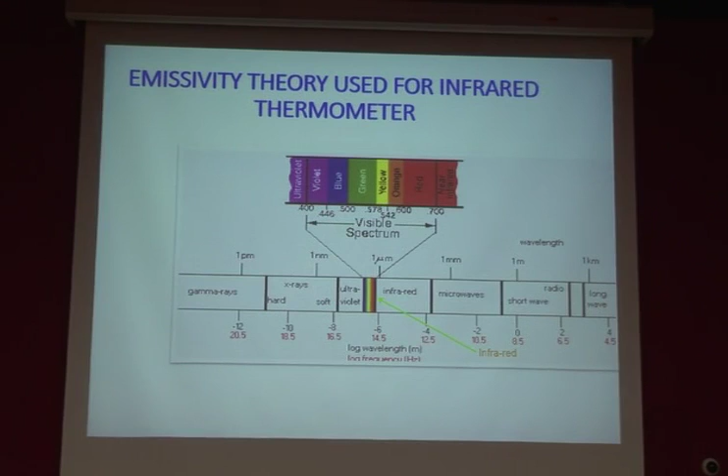This just shows you some of that. These are what you can see with the eye. Now the infrared takes us to areas we cannot see with our eyes. Infrared is not part of the visible spectrum, which is shown up there. But what it does is gather that information so we can use it.

It collects all the energy coming off as radiation, and then converts it. There's a little computer in there, if you will, that converts the captured energy and gives you the temperature of the material. This is what the equipment looks like.

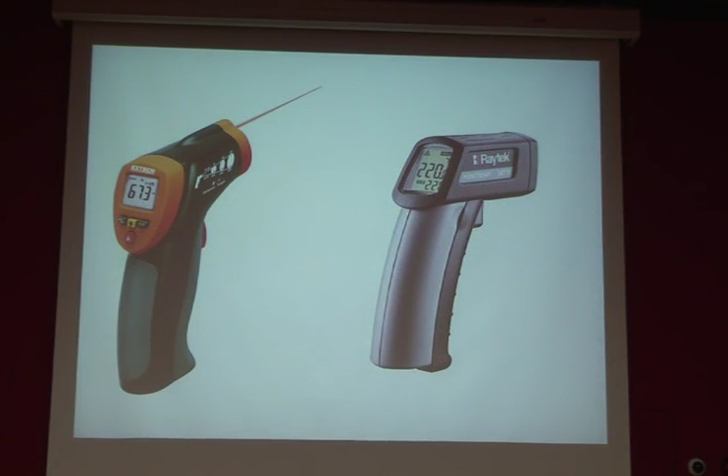These are 2 different types of equipment from 2 different manufacturers. It's a very simple piece of equipment to use. There are some limitations: you have to be fairly close to the object. If it's 1 centimeter wide, you have to be within 8 centimeters to take the shot.

So you cannot use this, for example, to take the temperature of the sun — it's obviously way too far away. So you have to be fairly close to it. There is a laser sighting on it.

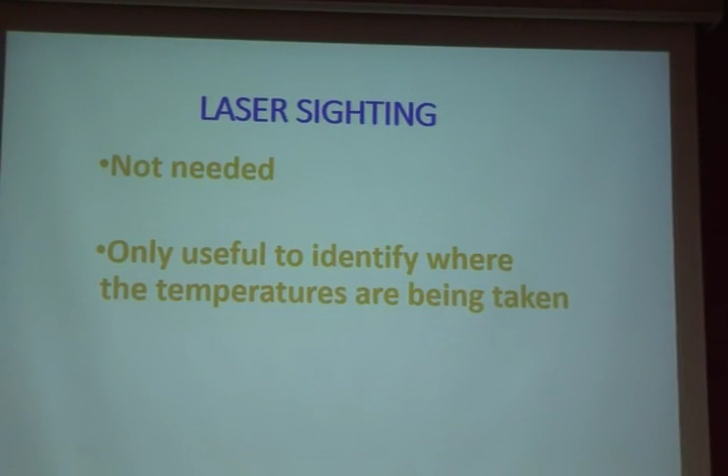I'll show you one of the pieces of equipment. This is what it looks like, and if you look over here, you can see there's a laser with it. The laser is important only in that it identifies the object we are taking the temperature from. It has no basis or input into the calculation itself — it's only useful in identifying the object.

Here is the typical information you get from this. The particular ones I'm showing you have a temperature range of 20 to 300°C, accurate to about 1.5°C. I have 2 pieces of equipment here that I was checking right before the presentation — the variation between them is about half a degree. That gives you an idea of how it works.

It's got typical battery power, and if you want to take it to the United States, you can actually use it on the Fahrenheit scale as well.

There are some limitations. We've already talked about one — you have to be fairly close to it. But what's very important is that all it measures is surface temperature. So if I were to take the temperature of my arm, I get a reading of 30.9, which would mean if I were in the hospital and they took my temperature that way, I'm basically dead.

What it's doing is measuring just the surface temperature of my arm. When a medical doctor takes my temperature, they stick something in my ear, under my tongue, or in some hospitals, elsewhere — I'm just glad they don't use something like this for that. So it measures only surface temperature, and that's very important for us to realize.

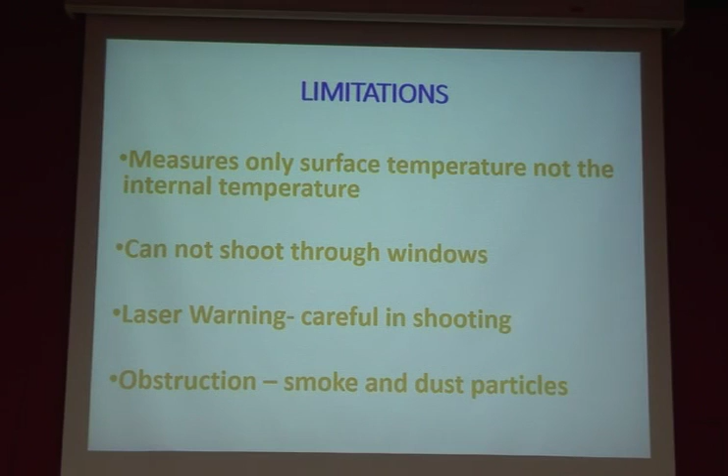So what can we use it for? Well, it has several uses. We can measure, in our construction area, the forms and the reinforcement.

In ACI documents, it says that all embedded materials should be less than 50 C.

Now, I live in Arizona, which is a desert. Very hot temperatures, we will get up to 50 C in our area. And unlike Singapore, our humidity is often less than 10%. So it's quite a bit different. If you get into your car in our area, many times it will be 60, 65, 70 C just because of the heat buildup.

You'll see the same thing happening in construction, that the steel forms or steel embedments will be very hot. We can use it to estimate the concrete temperatures during placement, and on many specifications, we have to keep the temperatures above 4 and below 35.

We can also use it for temperature control. We can determine the temperature of the mixture and maintain it during curing, and we can use it to determine the concrete temperature to get a good estimate.

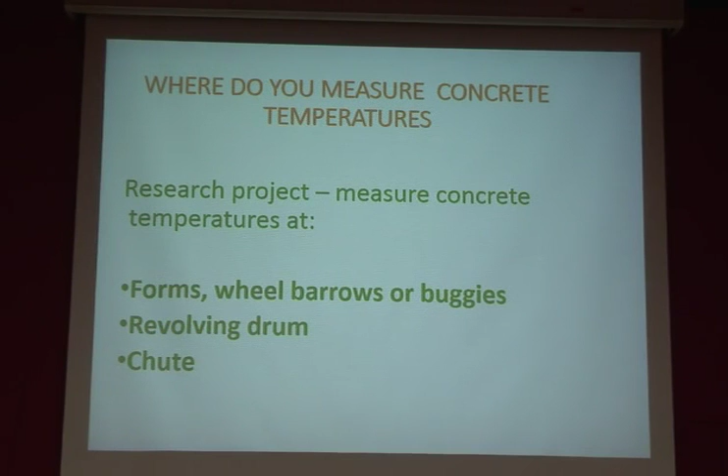Now, if we're doing this on an official basis, following a procedure, we have to stick the thermometer in 75 millimeters, tap around it to make sure it's seated, and wait for 2 minutes. What we did is a research project where we looked at where we could do this and get the same temperature that is often required on a job site.

We looked at 3 areas, and what we found is that as the concrete is coming onto the chute, if you take the temperature there, it is a very accurate estimate, very similar to the required temperatures we might take. We can use it to determine the concrete temperatures of a mixture.

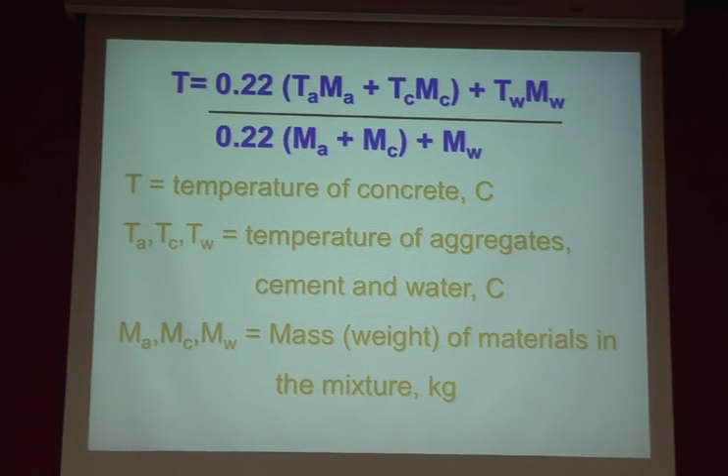This formula is a very common formula you'll see in many concrete textbooks. It tells us that if we know the mass of the materials and the temperature of each material, we can calculate it. So if we get the temperature of the cement, the coarse aggregate, and the fine aggregates, we can put it into this equation and calculate it.

I have a computer program if anyone is interested, and I'll leave that with the chapter if you'd like to use it. It's copyable — it's something we did as a research project at the university, so we make it available to the public. We would have to chill that water down to 24 C if we're going to maintain that 35-degree temperature.

And the way we would get these temperatures is by using the infrared gun to determine that before we put the materials into the concrete.

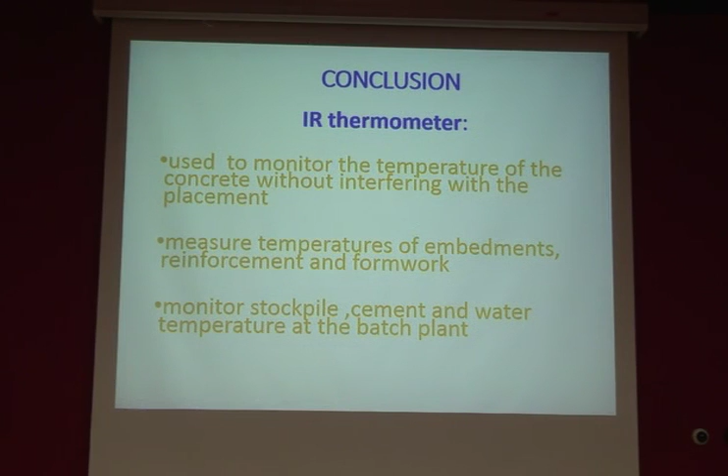So, to give us a quick idea of what we can do with the infrared: we can use it to monitor the temperature of the concrete without interfering with the placement.

Again, if you are going to do the official test, you've got to get a sample into your wheelbarrow. That means you are diverting the work, diverting the concrete into the chute itself, interrupting the work.

So if we use the infrared, we can check every truckload of concrete, especially when it's really hot. If we have an upper limit on the concrete, we can check every load and get information back to the batch plant in case we need to make corrections.

We could use it to measure embedded items in the concrete and the formwork itself, and we can monitor stockpiles and determine the temperatures of that material.

Our second part of the talk is about preventing plastic shrinkage cracking. This is a serious problem in very dry areas like Saudi Arabia and my home state, Arizona, where we live with this as a constant problem. Plastic shrinkage cracking occurs when the rate of evaporation is greater than the bleed water of the recently placed concrete.

In essence, what's happening is the evaporation rate, because it's very hot, windy, or has low humidity, causes water to be ripped out of the concrete. And when it's ripped out of the concrete, the end result is cracking.

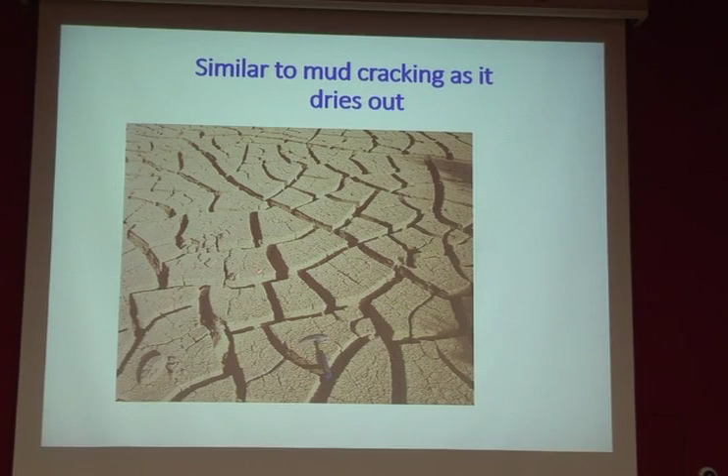You may be familiar with it if you look at a mud puddle drying out after a rain. You can see the cracks that occur in that. In concrete, this is what it would look like.

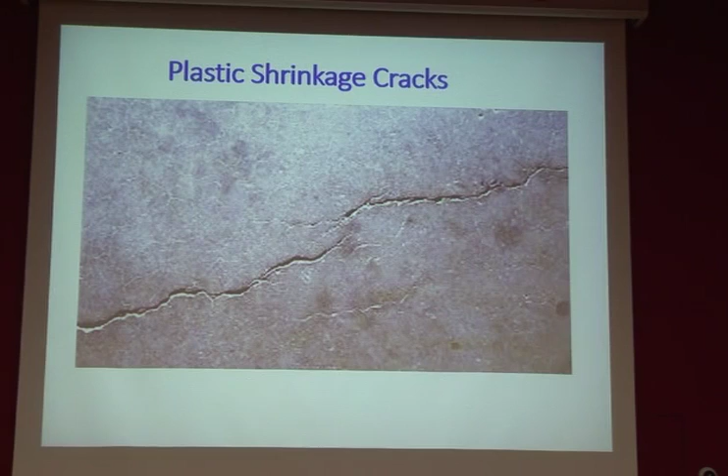These are cracks. If the wind is blowing, you can see where the wind has been blowing on that. They're very problematic in some areas. They tend not to interfere with the structural aspect of it, but where you have seawater or cold weather, water can get in and work the crack open even more. If it's seawater, that's a place where seawater can reach the rebar, leading to corrosion issues as well.

I've done a lot of work on this particular issue, and I've developed a computer program that's available for you if you'd like a copy. There's also a graph given in ACI 305 and 308 that's very helpful.

Now, the graph is old technology. What I'm going to show you is research work done in the early 1900s to determine the evaporation rate off of lakes. In 1940, some people at the National Ready Mix in the US found this and said water on lakes is very similar to water on concrete, so we can use this.

This is back in the 1940s when we didn't have a lot of computer programs. I didn't have computer programs—we did all our work by slide rules. Many of you who have collected old engineering books know we had a lot of charts and graphs to make it much simpler for the engineer to use. That's what this technology is.

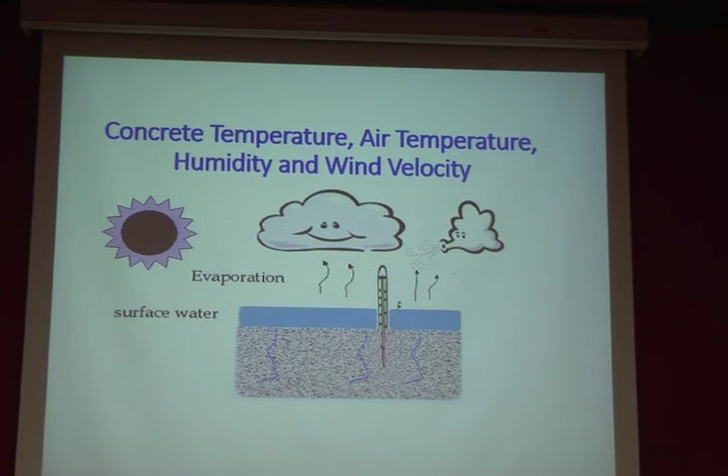What it does is show there's a relationship between evaporation and concrete temperature, air temperature, humidity, and wind velocity. If we know those, we can calculate the rate, and they give you this graph—not something most engineers today are used to using.

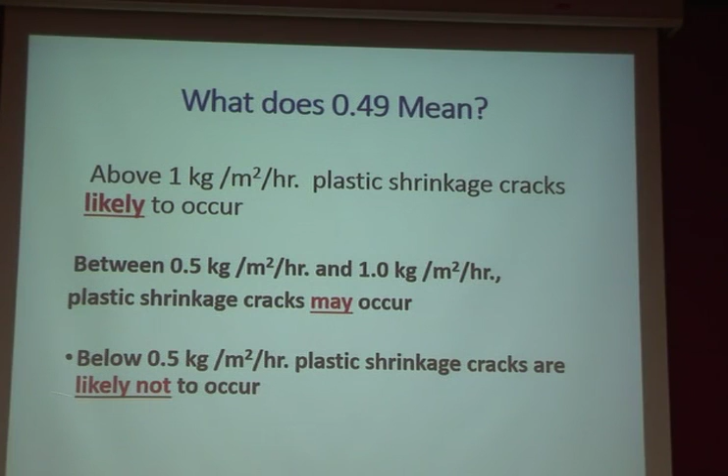So what does that mean? What we've found is if it's above 1 kilogram per meter squared per hour, plastic shrinkage cracks are going to happen—you can almost predict it. If it's between 0.5 and 1, it may or may not happen; it just depends on how lucky you are that day. If it's below 0.5, they're likely not to occur—you can almost predict that they will not.

In our case, because it's 0.49, we are in a safe zone, so we won't have to worry about plastic shrinkage cracks. Now we've solved one issue in that we can determine whether we can get plastic shrinkage cracks. But the second problem is, how do we get that information?

Where do we get wind velocities? Where do we get concrete temperatures, air temperatures, and relative humidity? I've gone on many cases, and as a young engineer, I got called in on many of these cases of cracked concrete. How do we get the information?

Well, the information after the concrete is already placed is already cracked. So that's not very helpful if I'm a contractor or a ready-mix supplier, because I'm going to get blamed for the concrete if I'm a ready-mix supplier. If I'm the contractor, I may even have to replace concrete. I recently worked on an airport where they had plastic shrinkage cracks, and whole slabs had to be removed because a contractor did not pay attention to the weather conditions.

So where do we get that information? When I started in this, I would go to the local airport information published in newspapers and things like that and collect that information. If that's all you have, that's probably the best you're going to be able to do.

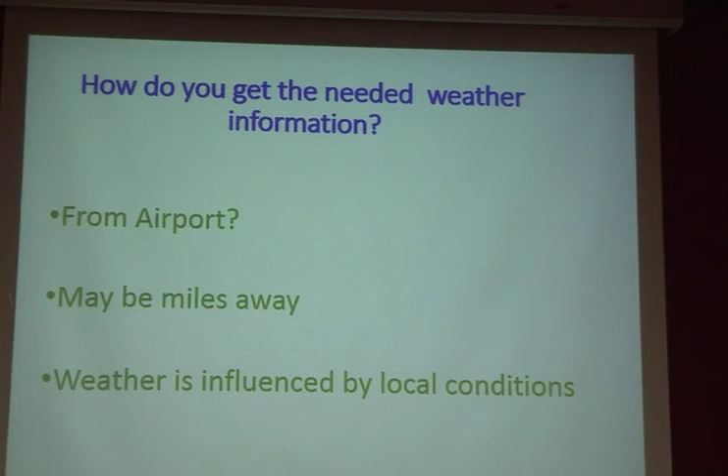So how do I get that information? Well, that's where this type of equipment, what we call a handheld weather station, comes into play. This is a particular one. By the way, many people who do competition shooting with rifles and handguns will use things like this. For people doing sailing or skiing, they might be using equipment like this.

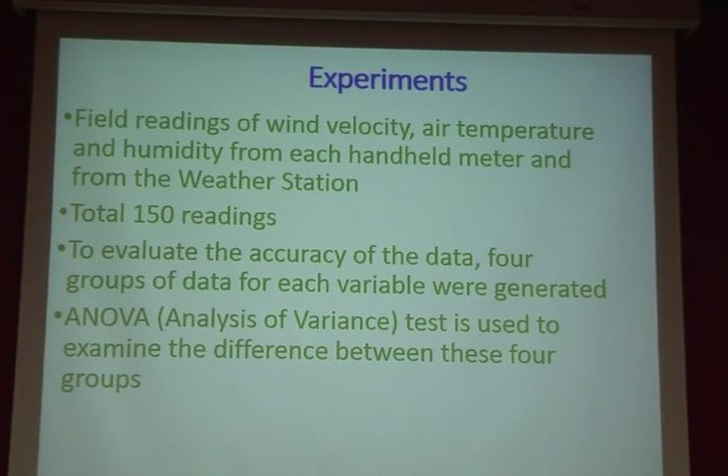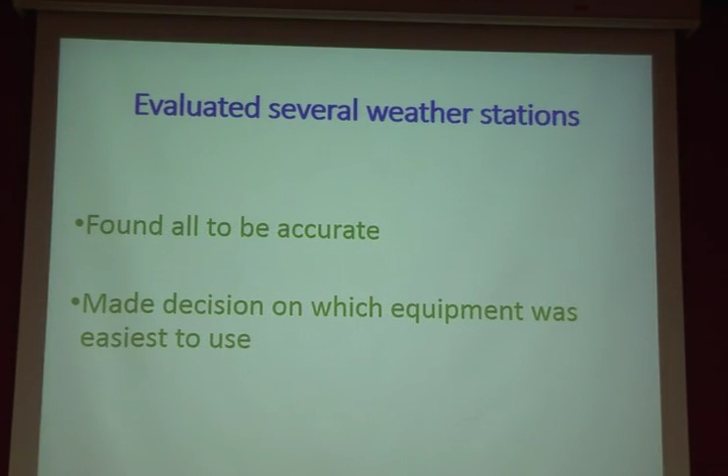I particularly like this piece of equipment because it's easier to use. Some of the other equipment requires pushing two buttons at the same time and things of that nature, and if you don't use it every day, it becomes very cumbersome to figure out how to use it. We found all to be accurate, and we made our decision based on which we thought was easiest to use.

Now, we have used this on airport construction projects in our area. We do most of our concrete work at night. We get up over 50 C in our area, so at night it actually cools down to maybe 35 C.

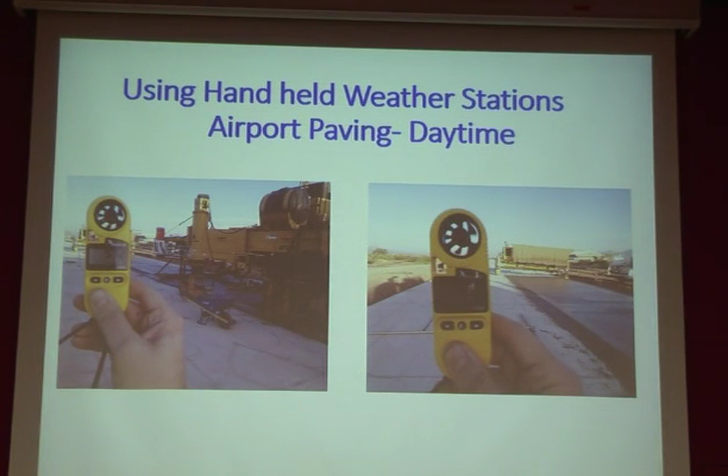When we have low humidity, which isn't a common problem in your area, but in our area I've actually seen relative humidity as low as about 2%. That's a very difficult time, especially when it's windy and we have hot days. Anything that increases evaporation is going to be bad for the concrete.

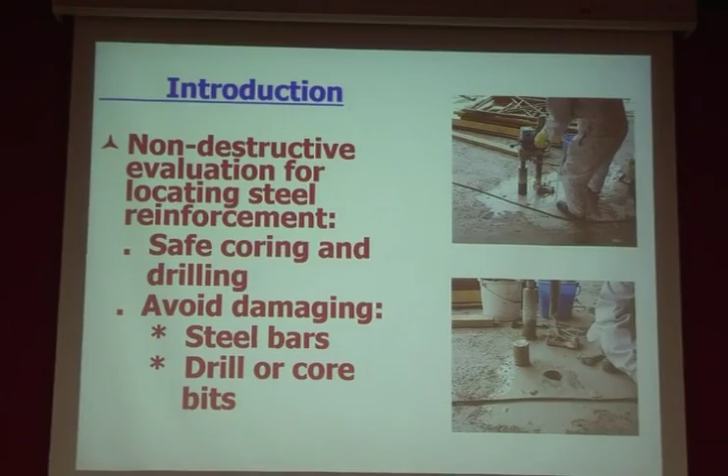Why do we need to worry about rebar anyway? Many of us get involved in concrete work where we have to take cores because we had an issue with the concrete. If we're going to take cores or drill a hole into concrete, the last thing we want to do is hit the rebar. So if we can find a way of not hitting the rebar with equipment that is relatively easy to use, that would be very beneficial to us.

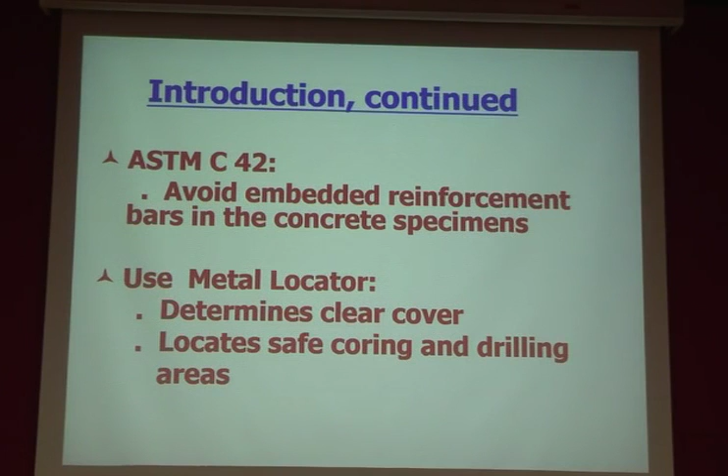ASTM C42, which is the code we use in the United States, talks about how to take cores. It says to avoid embedded rebars, and thus we need to determine where the rebars are and find safe locations.

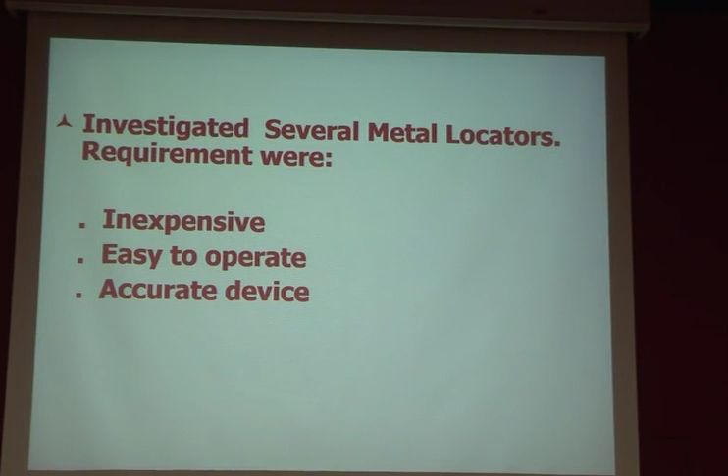In the United States, we would pour the concrete slab, and then we would pour on top of that the concrete that we would then lift up to be the wall. Thus, we have a lot less forming issues on that.

But we had to put in more steel. And because we're putting in more steel, it becomes very difficult to locate it when we have lots and lots of steel in there. If you are using a piece of equipment, there are many places where we have steel in there that is not continuous.

Now, if this is a concrete floor, we can pretty well know there's going to be steel running this way and there's going to be steel running this way. So knowing that, and knowing that the steel is continuous, we can use that.

So what we would do is we may scan this way 2 meters from the wall to find where the rebars are, and then go another 2 meters, then another 2 meters, and put chalk marks on the floor. If it's a rebar, it will be continuous.

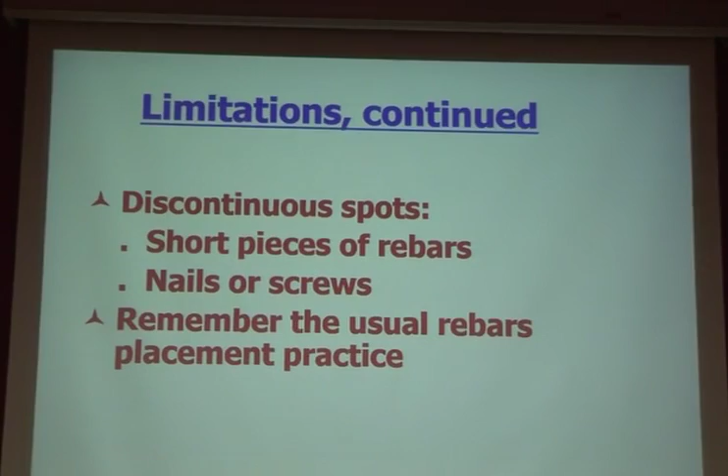If there's an area right here that I get a reading, that may be where someone dropped some nails in the concrete, or maybe there's a tin can there. There may be lots of reasons why there is a piece of steel in a particular area that is not a rebar. So you've got to be able to trace the rebar itself.

The equipment - first thing you got to do if you're going to do this, you got to remove all the dust and debris from the floor. You got to have a clean floor to start out.

You have both an audible and a silent mode. I don't recommend using the audible. If you're using that, it'll get very distracting to you because you'll hear beeps all the time. When I use the equipment, I turn it off and I spend my time looking at that equipment.

And if you don't have the sound on, you'll see a maximum reading. Then as you start to move away from it, it will go from a plus sign to a negative sign. So you can very easily determine when you are over the rebar, and it would also give you a reading of the depth of the cover.

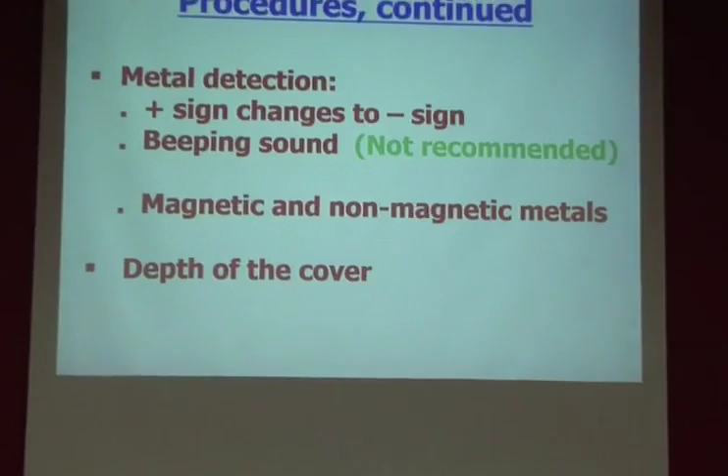So the way I would recommend that you do it is you use chalk marks. Again, move every 2 meters and put that down. This shows you how we developed a pattern. So we went every 2 meters, put that down, and then we went the other way, and we found the dotted black lines show the rebar locations.

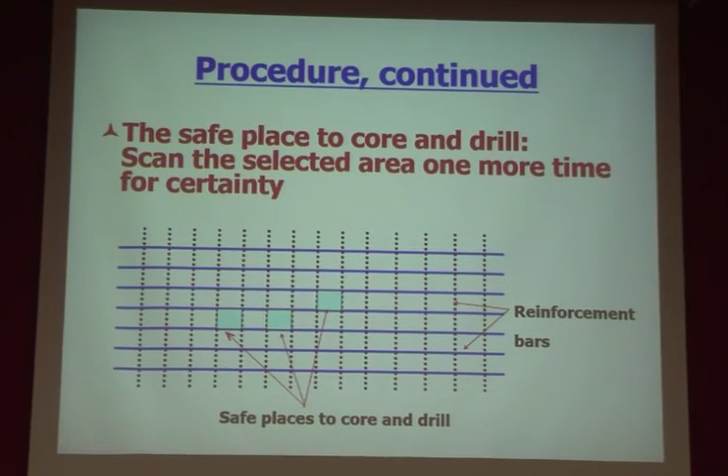So if we are going to take cores, we know, for example, right there is a good place to take a core because there is no rebar in those areas. So again, we've got a way of isolating where it is safe to take a core, or in another way of saying it, where the rebars are not.

So again, we did a study in our laboratory. And what we did is we used different size rebars. I put spacers on that. You have to get this up high enough and away from all metals.

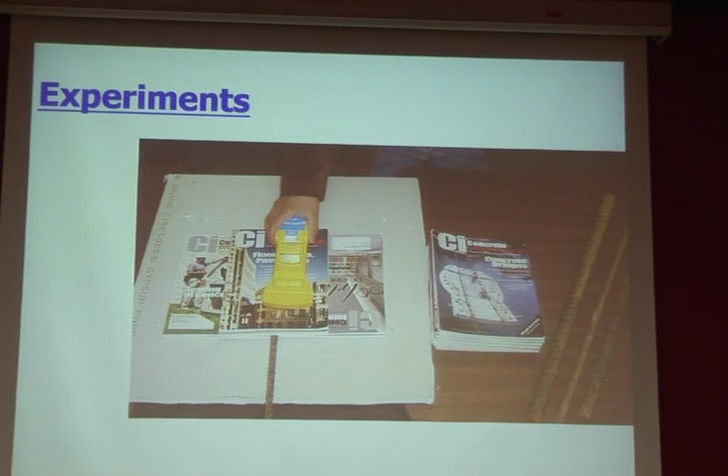The first time I did this, I had my students go to my office and I said, grab some of the magazines. It doesn't make any difference whether it's magazines or concrete, it's just measuring the distance between the rebar and where you are. They got a whole bunch of magazines that had staples holding them together. And when we did the scanning, we couldn't make it work. Well, it was identifying where the staples were in the magazine that was holding it together.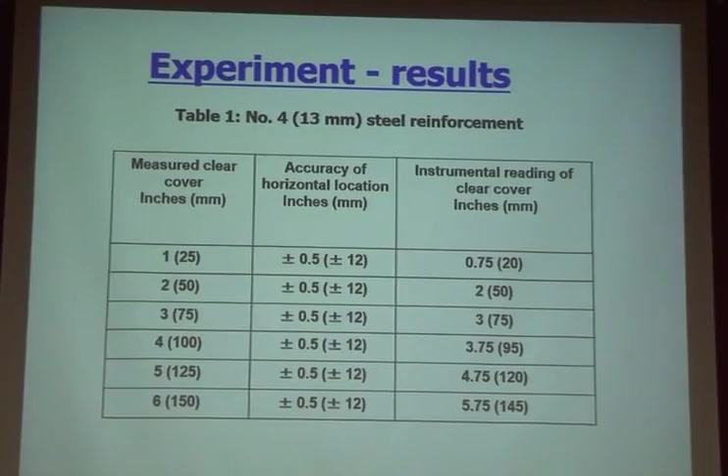This is done in the US, so we had a number 4 bar, which translates to 13 millimeters. You can see that when we scanned it, we were within 12 millimeters both ways, scanning it to be able to locate the rebar, which was stationed at 25 millimeters, and it gave me a reading of 20. You can see the data down there, the ones in parentheses. That's for a number 13 rebar.

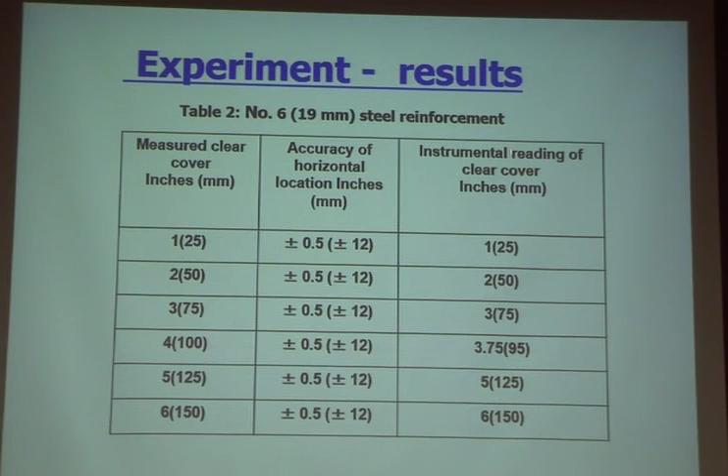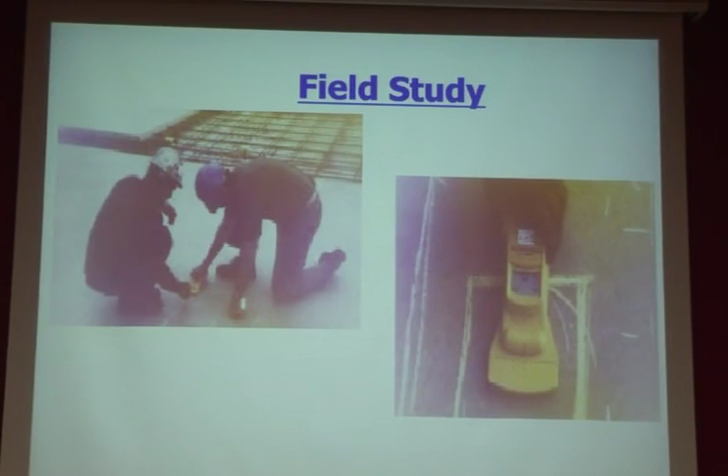I was doing some projects over in Mongolia, working with some of the students there. This shows finding areas that are a safe location, and this is a field study where they were finding the location of steel in pipes and finding steel in them.

Speaking bluntly, if I was doing a consulting job and we had pre-stressed cable in there, I would probably use a much more sophisticated piece of equipment, like ground penetrating radar or some of the more expensive cover meters, because as you saw here, it was within 12 millimeters, and the last thing you want to do is hit a post-tension cable.

But for a typical construction rebar, where I'm trying to make sure I avoid where the rebar is, I find this is a good piece of equipment, and one that I can easily train a crew on how to use.

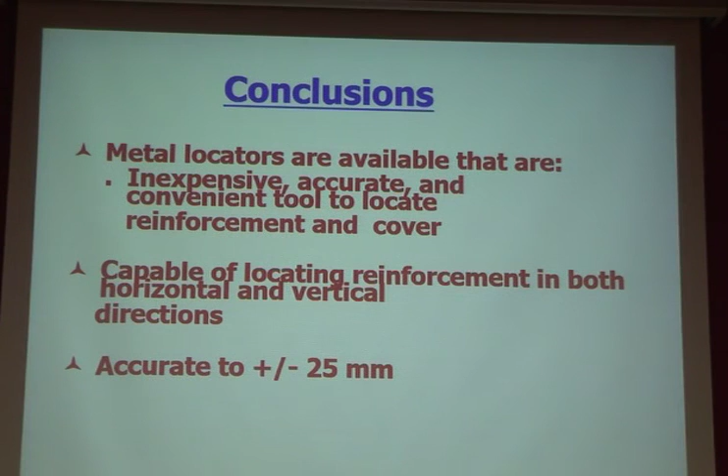It's accurate within, the company says, 25 millimeters or 1 inch. We found it was really a lot more accurate than they claimed it to be, and suitable for finding locations.

As we were working on this, we found there was some need for other equipment, and many people will even want an easier to use piece of equipment, because what they're trying to do is a much simpler type of thing. As an example, if I'm doing a masonry wall, I may want to just do a quick check - did they put the steel in there? Or if it's got horizontal joints, are there steel in the joints?

So there was another piece of equipment out there that we were investigating. The company asked me, is this equipment easy enough to use so that people not familiar with using this type of equipment, and international people who may not have English as a first language, would they be able to use this piece of equipment?

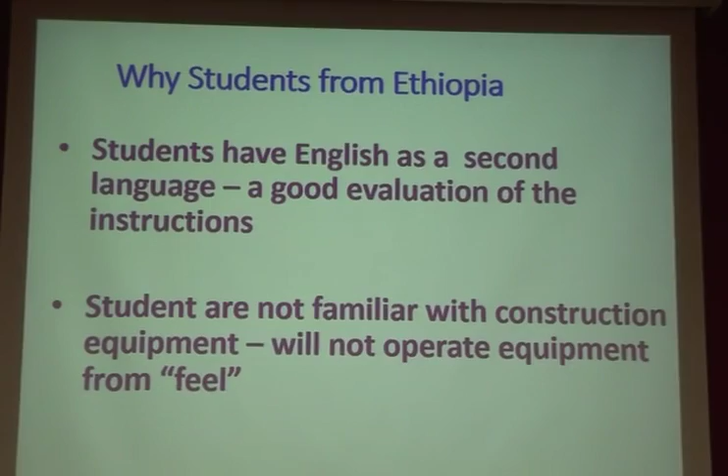So we went over and did a study while we were in Ethiopia, starting the ACI chapter there, and I worked with some of the students there. The students were ideal because most of them, unlike people who work in construction and are used to using tools, they are not. So they were ideal for testing how to do it.

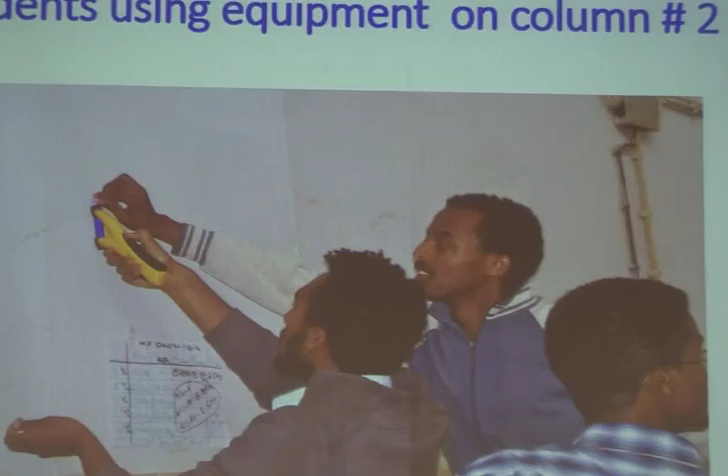They're going to be basically close to the edges, so they were able to find them as well. You can see this guy, I think that was the guy that was very concerned in the beginning—now he's getting it. What we found is by just following the DVD, going through it a couple of times without any written instructions, without me explaining through a long lecture how the equipment works, they were able to do it.

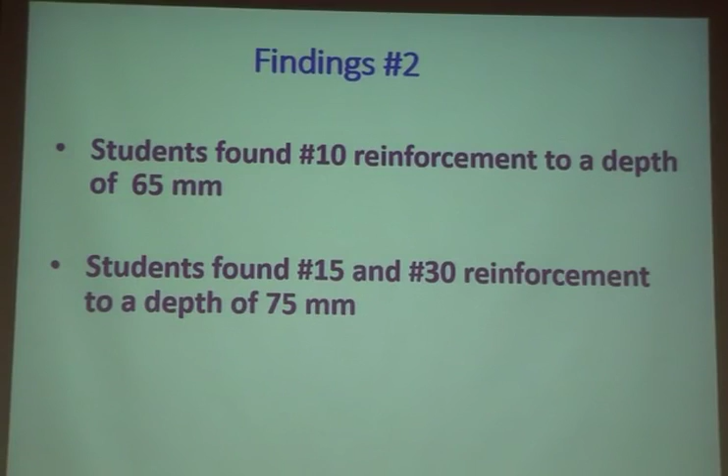They were able to find 10, 15, and 30 millimeter bars quite easily. The 10 millimeter bars they could find to a depth of about 65 millimeter. The 15 and 30, they could go to about 75 millimeter depth. So it does have a limitation—it's not going to find the deep steel, it's not going to find the bottom steel of a beam, for example. You might be able to scan it from the bottom side and find it, but again, it's not going to tell you depth. It's just going to be able to tell you it is there.

So we found with the students, when they were doing this, they were able to locate the reinforcement columns. It was logical, and it was a very simple piece of tool to use. It has great use if you've got a very simple application. So I would recommend that piece of equipment if you're going to do it.

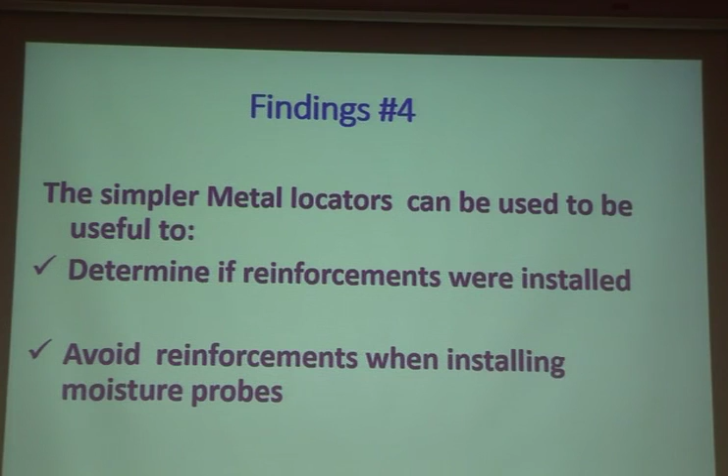And there are some other areas where this is important. In the U.S., on flooring, we have to install moisture probes, and we've got to be very careful we don't hit steel. And when we're using the other piece of equipment I'm going to show you, the rebound hammer—the U.S. requirement is 3/4 of an inch, which translates to 19, you might as well say 20 millimeter, to keep it away from any reinforcement as we're doing that type of testing.

So that type of equipment has some great uses—very simple, very inexpensive—but it has limited use if you're doing a very detailed engineering investigation where location of steel is critical. I would recommend using some of the other pieces of equipment.

Last piece of equipment I'm going to talk about is the rebound hammer. And the rebound hammer has a good reputation and an awful reputation, and part of the reason—we'll go through this—is why people love it and why people hate it.

The rebound hammer is a non-destructive testing technique in particular. What is the definition of non-destructive? This is the definition I wrote—I like this, so you won't find this in any textbooks unless you're reading some of my work. It's the measurement of a property that is easy to measure, to estimate a property that's more difficult to measure. Now if you stop and think about it, a lot of this equipment we're talking about, we are not measuring exactly what we are trying to do. If you look at the infrared, we're measuring radiation energy off it. We don't want to know the radiation energy, we want to know the temperature.

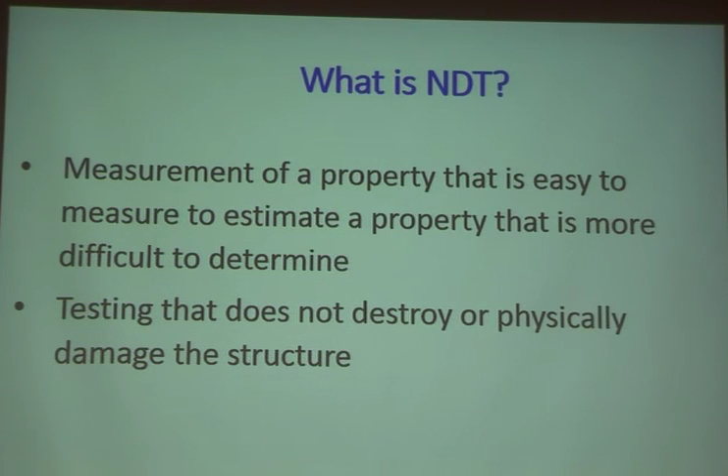Some of you may be familiar with some of the other non-destructive testing methods that we use—Windsor probe, where we shoot a dart into the concrete, or ultrasonics, where we put sound waves through the concrete. Again, all of these are measuring properties that, if you had the right equipment, we could measure, but that's not what we want. We want to use that to estimate strength.

Well, why is non-destructive testing not an exact science? Part of the reason is concrete itself is not an exact material, in that we put together cement, coarse aggregate, fine aggregate, chemicals, water, and it is not going to be exactly the same all the way through.

Concrete surface tends to dry out, while the interior remains wet. As a graduate student, I worked on a project looking at some 50-year-old concrete. We were using cutting torches near it, and the concrete was hissing and popping. There was still, after 50 years, moisture in the interior that was being turned to steam and blowing off part of the concrete. So that concrete is going to stay wet for a long period of time.

And the third part: every piece of equipment is going to be a little bit different, so there's going to be variations in the equipment.

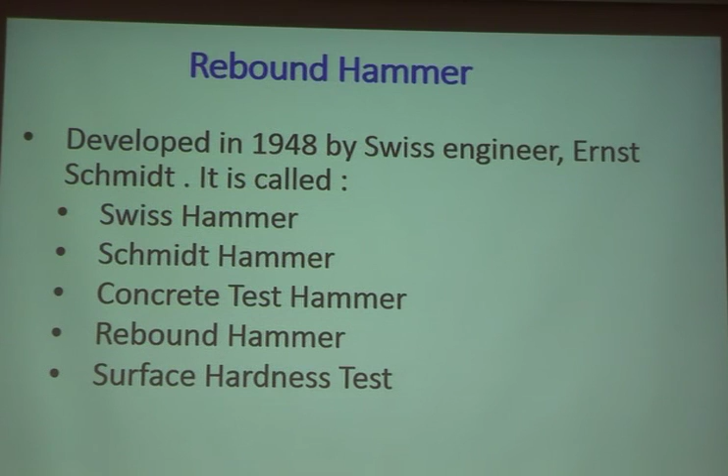The rebound hammer, some of you may know it by other names. It was developed in 1948 by Dr. Ernst Schmidt, a research scientist now part of one of the companies that makes the equipment. Thus we call it the Swiss hammer, because he was a Swiss engineer, or the Schmidt hammer, because that's his last name. Or if you want to keep away from those, you use the concrete test hammer, rebound hammer, or surface hardness tester.

Virtually all concrete companies have them. Many ready-mix plants have them. Most testing laboratories have them. In the United States, just about everyone that sells concrete products—the cement companies, the admixture companies—have these. So there's more than 100,000 of them.

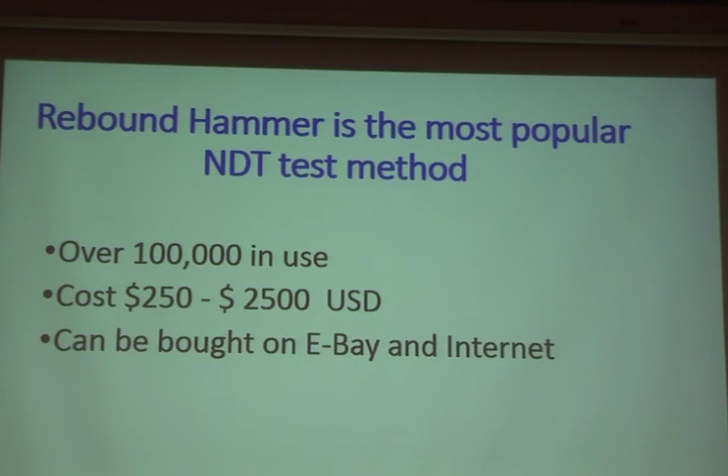It is so popular you can buy them on eBay and get them through the internet. You can pay as low as $250 US dollars, up to about $2,500 for some of the more sophisticated pieces of equipment. We have ones that can actually connect to your computer. There's also very sophisticated equipment designed in such a way that it stores all the information that comes out of it and gives you exact numbers of strength of the concrete afterwards.

What this rebound hammer really measures is the surface hardness of the concrete. It has virtually nothing to do with the strength. There's no theoretical relationship, so we cannot defend using the rebound hammer by showing a mathematical equation of how the concrete works.

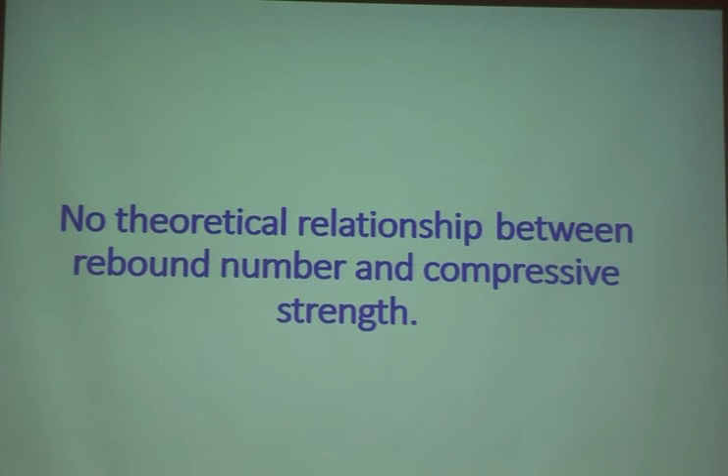Now I'm going to do a quick demonstration. I'm going to show you the poor man's rebound hammer. This is a golf ball. If I'm holding this up, about 1.75 meters, and I drop it—for those up front, you saw it bounced back about that high. That is the whole theory.

What we are doing with the rebound hammer is taking a plunger, hitting the concrete, and seeing how much it bounces back.

So that's the theory. This is the rebound hammer, now ready to be used. I got to get it ready—it's now in the process. To use this, I'll do it over here. So what I would do is push it in. I'm not going to do it because I don't want to do any damage. But I would push this in, and there is a reading right here that would be, say, 20 or 25.

Now, what do I do with the 20 or 25? That becomes the second part of what we're going to talk about. We get a reading from the rebound hammer, and for some of you who have used one, you'll see on the back there is a chart that says a rebound number of 25 correlates to a certain strength of concrete.

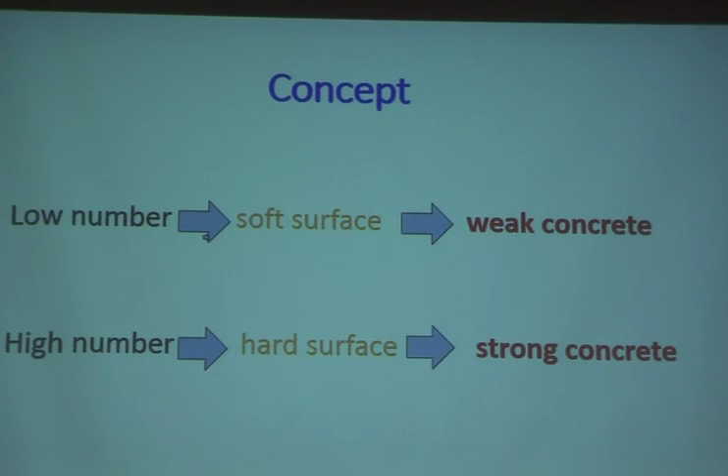What we have found using this equipment is that a low number, say below 20, indicates that surface is soft. For those of you who golf, if I take a golf ball and drop it on a steel plate, it bounces up almost as high as I dropped it from. If I drop it on something really soft, it absorbs the energy and doesn't bounce very high. So that indicates a soft surface, and a soft surface tells us we have weak concrete. If I get a high number, that means I have a hard surface and strong concrete. So that's the theory behind why the rebound hammer works.

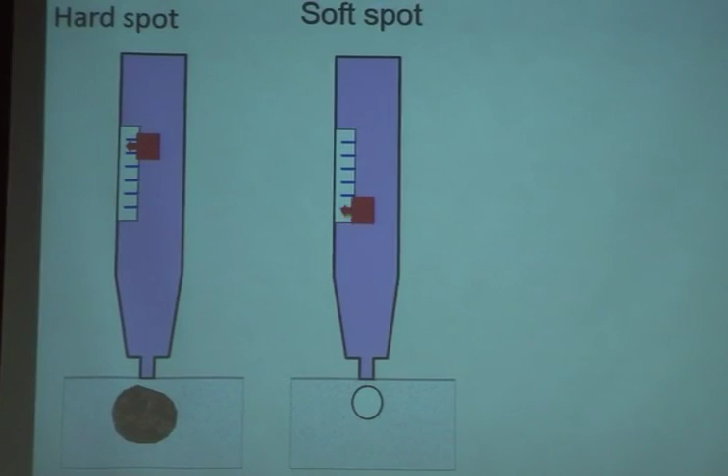Now, if we're using this, we have to recognize several things we need to be concerned about. First off, if we have a hard spot or rebar very close to the surface, and I hit that with a rebound hammer, I'm going to get a very high number. If I look at an area where I have honeycomb concrete or a void, I'm going to get a low number. These could be right side by side.

Now you get an idea of why people don't like it. Because if I go do a study looking for areas that have a tough surface or rebar close to the surface, I'm going to get entirely different results than if I look for areas that have voids. So that's one of the problems we have. If I have an irregular, rough surface, who knows what I get? I may get a high value, I may get a low value, because it just depends on how I'm hitting that surface.

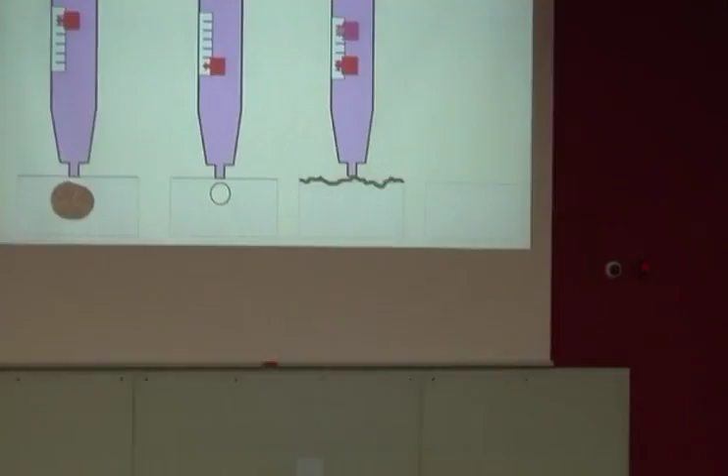So when doing this, the equipment includes a little grinding stone, though they didn't bring that part. What I have to do is get a smooth surface, removing that top surface of the concrete to do my testing. If I have a hard troweled finish and don't remove that, I'm going to get a very, very high reading. Now, unlike some other tests, we have to take multiple test readings.

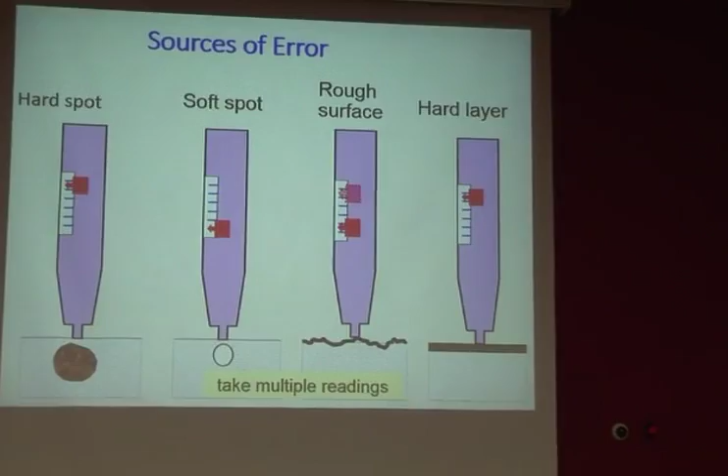The ASTM standard we use in the United States says we must take at least 10 different readings, and each reading has to be 25 millimeters apart. So if you're using that little grinding stone on a rough surface, you're going to get some arm muscles, because it takes a lot of effort to get that surface smooth enough to do your testing.

So what can you determine? Well, you can use it to determine where you might have low strength. Here's an example. I have a wall here. I analyzed the wall, and these are the numbers I got.

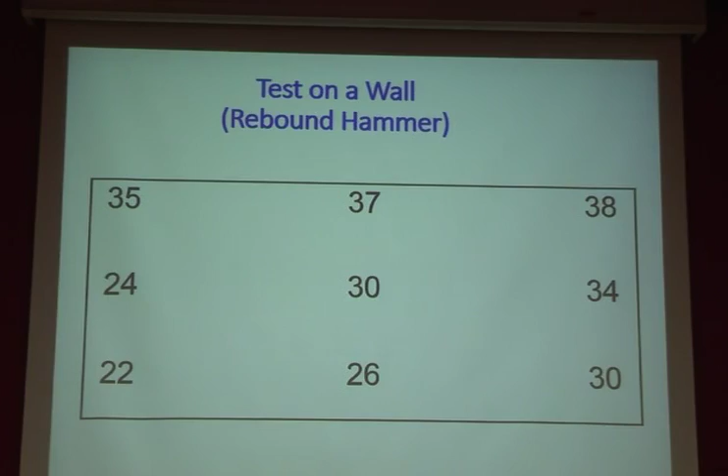Where should I take the core? Well, if I'm the contractor or the ready-mix company, obviously I want to take it right there. But if I'm the engineer responsible for the building, I have to take it right here, because that's where the weakest concrete is going to be. So if I have a job with a 30 megapascal requirement, and I core that area and get above 30, I know the rest of the wall is okay. That would be the area where we'd need to core, and if that core passes, we know the rest of the wall is going to be of higher strength.

We can use it to estimate concrete strengths. But the rebound hammer has to be calibrated to the same mixture. That means the same amount of rock, coarse aggregate, same amount of sand, fine aggregate, same cement. All of this has to be the same.

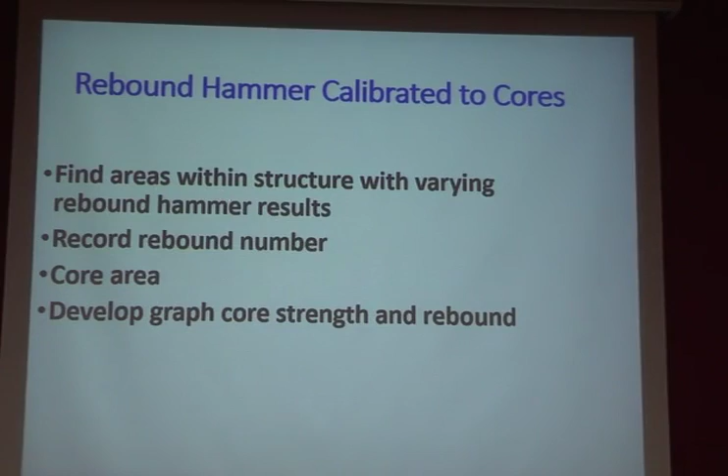And what we'd have to do is calibrate it to cores. Again, this is per ASTM requirements. So we would find areas within a building that have various rebound numbers, core it, then develop a graph, and this would be an example of what we did. Let's say we're looking at a column, find where the rebars are, grind it smooth, and use the rebound hammer.

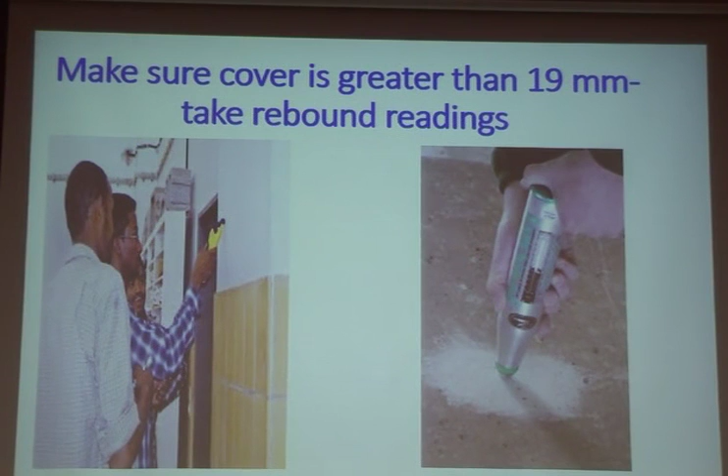I almost replaced that slide because when using the rebound hammer, it has to be straight. To show it at an angle, I'm hopeful that when we took that reading, it was actually at 90 degrees. We would then remove a core.

In the United States, we follow ASTM procedure, which says that immediately after taking the core, we wipe it dry and put it in plastic bags. It stays in plastic bags for 5 to 7 days, and then we test it at our testing machine. That develops our core strength. Again, this is per ASTM C42 requirements, and I know you probably have similar requirements where you are.

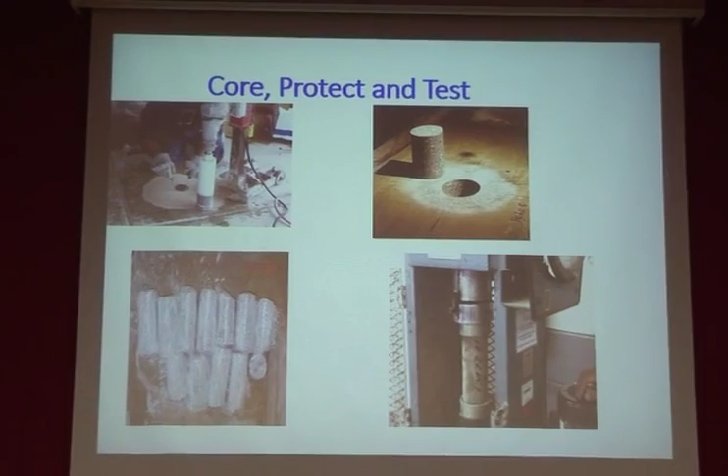And that's why you cannot use that graph on the back of the hammer. You have to calibrate it to the mix and the rocks that you are using.

Now, if you do all your work right, it's reported in textbooks to be 70 to 95% accurate. I've done some research work on it. When I was a young engineer, I did a study comparing rebound hammer to Windsor probe, where you shoot a dart into the concrete, and to ultrasonic, where you put a sound wave through the concrete. I had just learned how to use ultrasonic, and I wanted that to be the best because it was the most sophisticated of all.

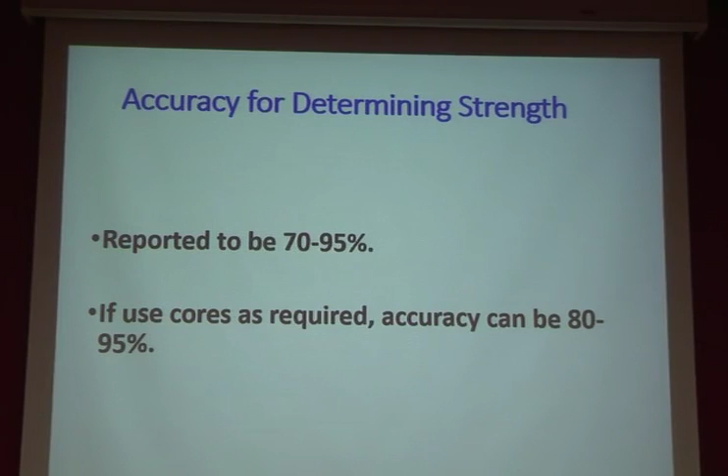I found the rebound hammer was the most accurate if you take the time to do the calibration on it. And I found it much higher than that 70 to 95 -- I found 80 to 95%. A very, very good indication of the strength of the concrete.

Now, the rebound hammer has to be maintained. What I find is a lot of people have it stored in a closet, or maybe in the glove compartment of your truck or car, and they only use it on an occasional basis. And that's another reason why it sometimes gives us very poor results.

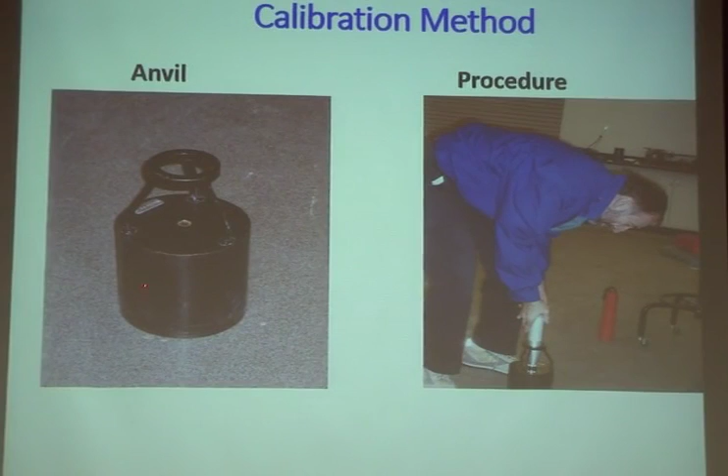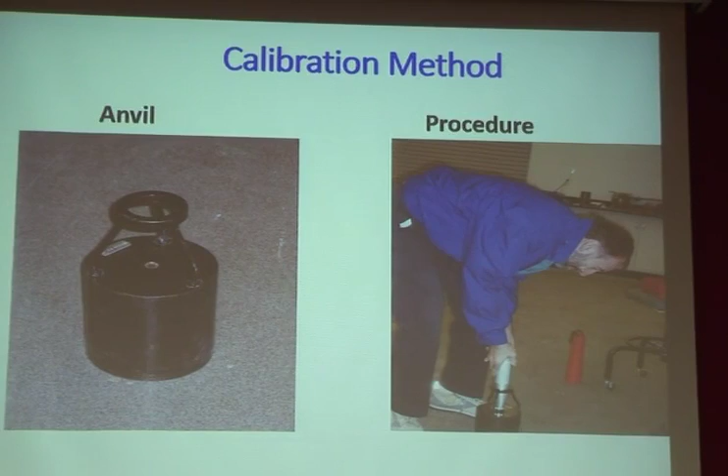There is a test anvil, a big piece of steel, probably weighing about 30 kilograms, with a place where it holds it exactly. If you're using that, it has a value of 85 on the rebound hammer. So now we have a way that we can actually calibrate it. It makes sure that it's exactly 90 degrees, and I can do a comparison to make sure it is being well maintained. Why is the calibration necessary?

The hammer is stored with a spring. If you saw how I put this in here, this has to be under compression when it's stored. So that spring is going to show wear. I had a friend of mine in Mongolia who actually broke the spring of his rebound hammer. On a trip to Mongolia, I had to get him a spring. Never heard of that before, but the parts do wear. Operators change, and it's very important to follow the operating procedures on how you do this.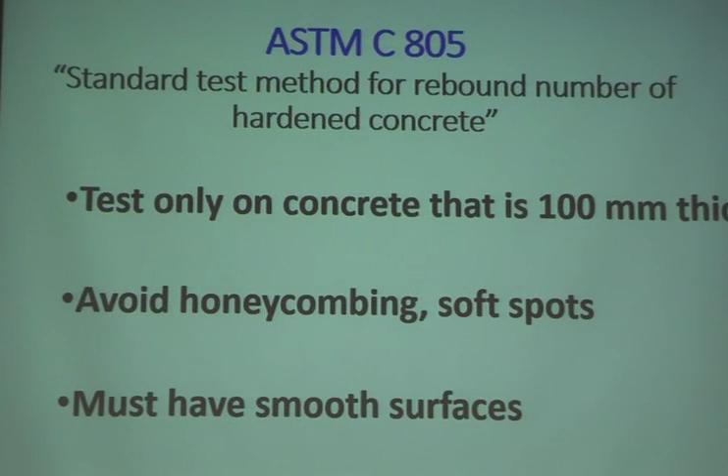For many of us, we're not a testing laboratory. For some of you contracting this out, it is very important that if you're going to pay for it, that they do it right, and that you have a procedure for how they do it. There are ASTM standards on how to do it. In Singapore, you probably have some very similar standards. These are some of the things -- I'll quote this out of ASTM.

We have to test concrete that's only 100 millimeters thick. If it's thinner than that, you get what I would call the diving board effect -- if I hit it, it's going to spring if it's a very thin piece of concrete, so you're going to get peculiar readings. You've got to avoid all honeycombing, all soft spots. You must grind it to get a smooth surface. On some jobs I've worked on, we'll actually use a mechanical grinder because it's such a big area that we're looking at.

Not a problem here in Singapore, not a problem where I live -- you can't test frozen concrete. If you live in Mongolia, where it gets down to 50 below zero, you cannot use it in the wintertime.

You got to keep everything. Your testing hole has to be more than 19 millimeters from steel. You might as well say 20 millimeters. That's 3/4 of an inch, and that's why you get the funny number.

Do not compare ground to unground surfaces, so you got to make sure everything is ground. You have to hold the rebound hammer exactly perpendicular to the surface. And as you can imagine, if I'm testing down, gravity is working with me. If I'm testing up, gravity is working against me. So those numbers have to be calibrated depending on the direction you are holding your rebound hammer.

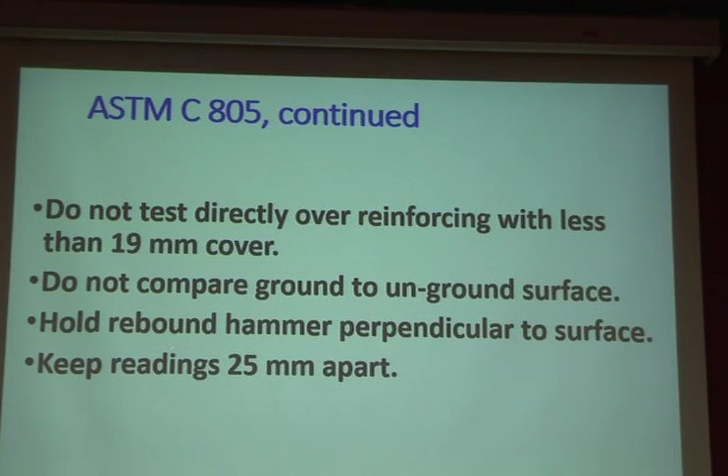You got to keep all your readings 25 millimeters apart. And the procedures we use in the United States, we take 10 readings. We discard a reading if it's more than 6 units from the average. And if you have 2 readings that vary by more than 6, you throw all the values out. You have to completely redo the test. So the idea is you got to keep it as uniform as possible.

And on some of the jobs, if you have a lot of variation in the concrete, maybe you're going from load to load, and you had one load that was pretty problematic, you may not be able to use those testing methods. It has to be compared to cores.

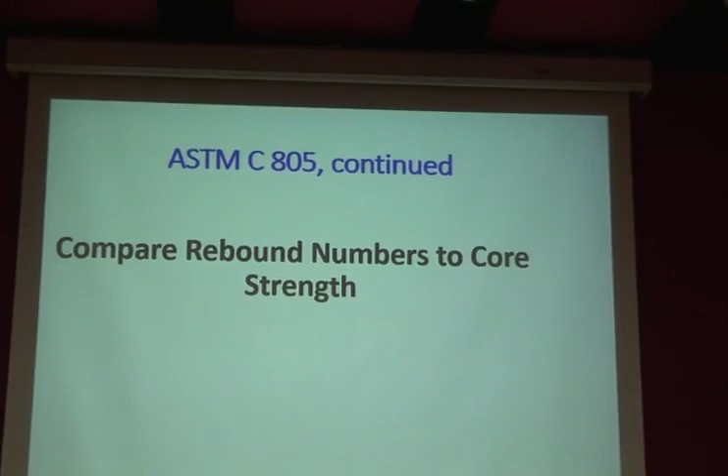Older standards that we have in the United States said you could compare those to cylinders, or in your case, cubes. That's not what we can do now.

And our procedure says, ACI 301, which is standard for concrete, it says rebound hammers may be permitted to determine uniformity and locations of areas to be cored. These methods shall not be used to evaluate in-place strength. So it says it is a useful tool. It helps you identify, but it's not the final determination of strength.

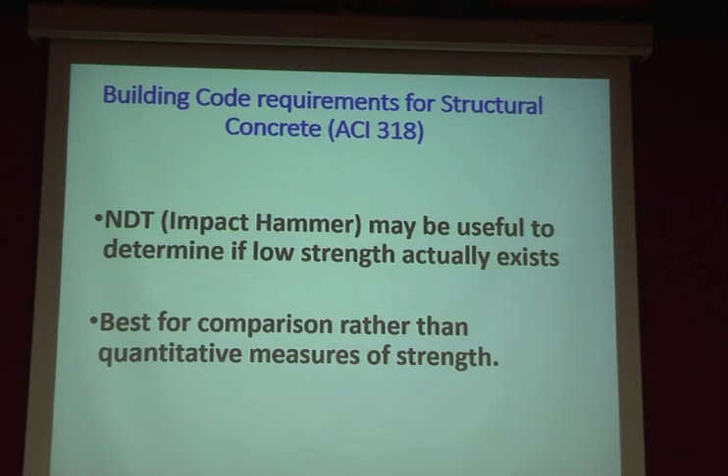Building Code 318 says it may be useful determining if low-strength concrete exists and is best for comparisons rather than quantitative measurements. And again, it is discouraging you from making a final determination from a rebound number. It is a tool, not if you're going to go into actually determining strength of concrete, you have your cubes that you took, or you need to core.

Make sure before you even do this that the engineer is agreeing to it. The building officials, if the owner, make sure they want you to do this and they're willing to accept those results. And make sure, what am I trying to do with the results? Again, I'm not going to go thump the concrete, do this testing, and then say the concrete meets a design requirements. And I would say the second part of that is the operator experienced.

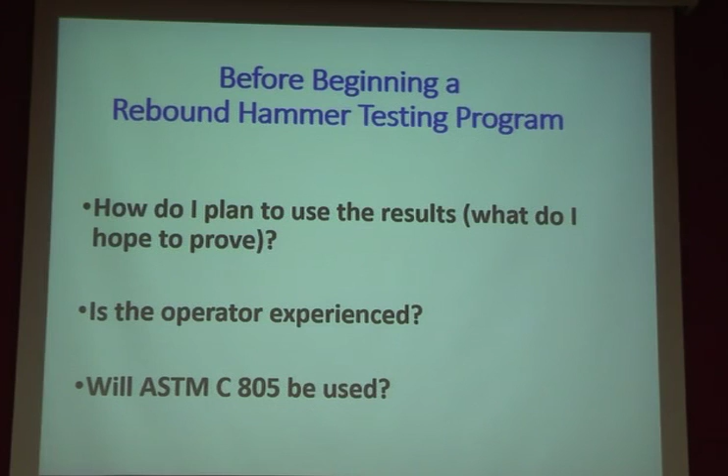Do they actually know and have they read the standards that they're going to be doing? In the United States, are they going to use ASTM C805? Or in Singapore, are they going to use the local standards for concrete? Make sure they got a procedure that they understand.

And then the last part of this is, can I safely get to the concrete? As much as I would like to look at my concrete through binoculars, if it's high up, and I've worked on some jobs that are 100 meters tall, big silos, how do you get to the concrete that's halfway down? That becomes a problem. And if you're doing it from a ladder, just think about if you're working from a ladder and you're trying to push this rebound hammer in that while you got your arm hooked around the ladder.

Not a very safe way to do it. I don't know if any of you have ever worked from a boatswain's chair. That's where you, when we were looking at some of these silos, we came off the top and we were sitting in a little seat, with a cable, if you will, holding us, between us and falling to the ground. Well, you're going to get too much movement if that's what you're trying to do.

You really have to do it from scaffolding. If it's not on the ground, you got to do it from a man lift. You got to have something solid so that you're not going to be moving and so that you're safe on it.

Again, I just did a project where I was looking at some honeycomb concrete, and they put me in a man lift and a complete safety harness, tied off. I didn't think there was any possible way of me falling out, but in the United States, safety has become so critical on some of these jobs, as I know it has in many other places as well.

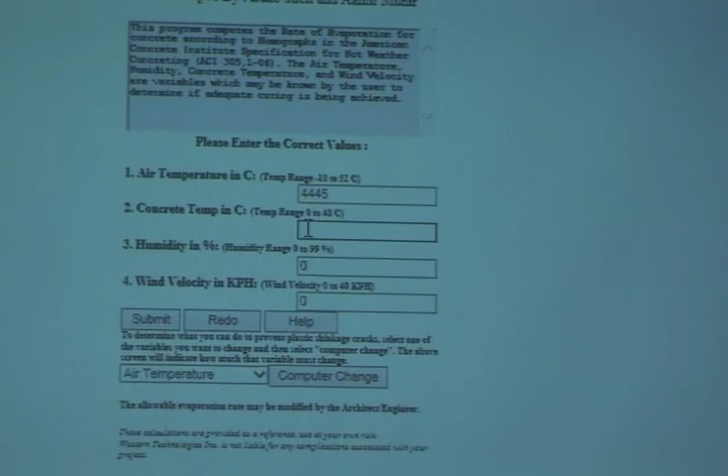This is what the computer program looks like, and it's an interactive program. I'm going to put in first a problem that we might have in Arizona. Let's say we got a 45 degree air temperature, concrete temperature... okay, put it in. Whoops, 45. You can see I mistyped it and it told me I made a mistake.

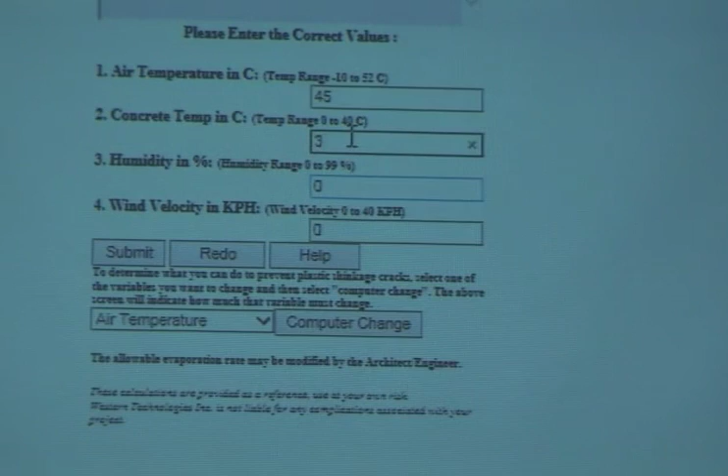Concrete temperature, let's say it is 38 degrees. Humidity, 10%. And wind velocity, let's make it 28. I submit that. This is designed like a traffic light.

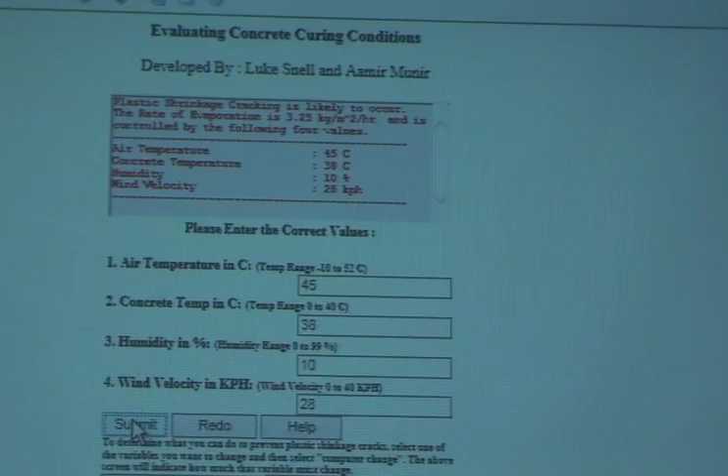So the red tells me I'm in trouble. And this particular one, the number I had to be below was, what, point... or 1, and I'm at 3. So what can I do? Well, if I go down here... I'm going to have to re-enter it again.

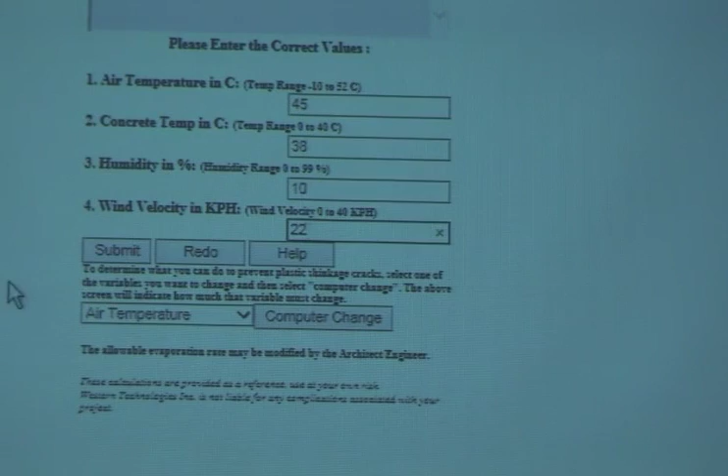45, 38. And what was the wind, 20? What did I say, 22? Okay, if I go down here, let's see what happens if I want to wait for a better day. It says I'm not going to get there.

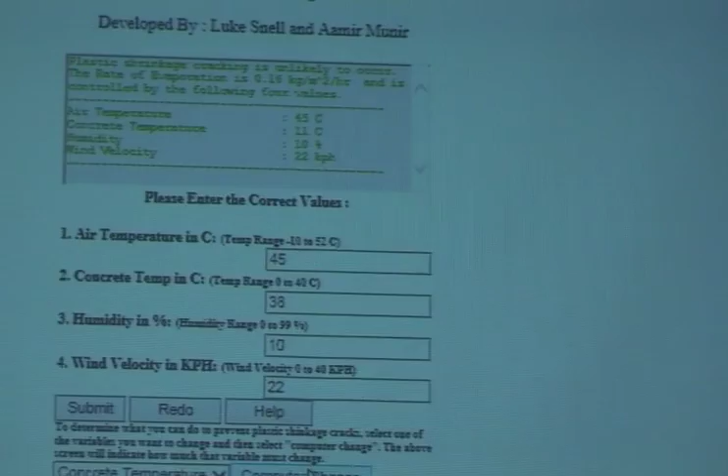Let's say I lower the concrete temperature. See, it turned to green. I got to get the concrete temperature down to 11. Is that going to happen? Yeah, if I use ice, I could probably drop the temperature about 8 degrees Celsius.

There are some cases in the United States where we use liquid nitrogen. We've used that on a lot of mass concrete construction. Very, very expensive, but it can be done.

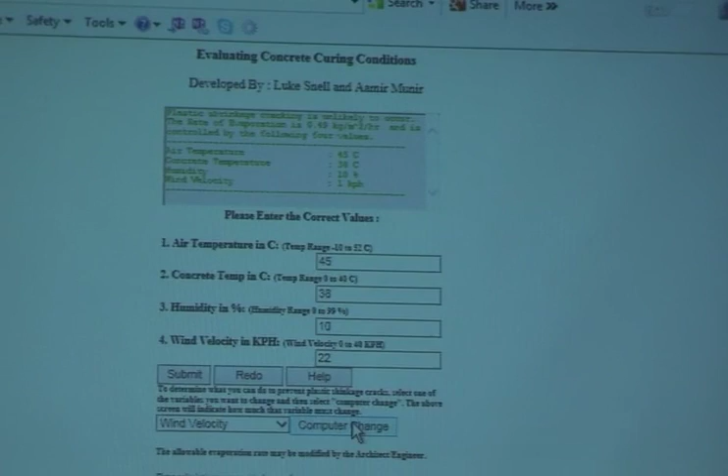Let's see what other options I might have. We've got a 22 kilometer an hour wind. Let's go back to our original submittal and see if we just wait for the wind to die down. Yeah, if the wind is down below 1, we're okay. So we got to wait for a very, very, almost windless day. Can happen.

Again, I was working with a company that was having all sorts of problems like this. They were doing the 4th floor of a parking structure. And what we did, because the columns were sticking up, we put plastic around the columns and fogged it, using a method where they put a lot of moisture in there. The plastic kept the wind off it and kept the moisture from being blown away. The moisture also lowered the temperature.

One of the very common ways we cool outside dining areas in our area, because it's so dry, is we just put moisture in the air. If you're in Singapore, putting moisture in the air just makes it more uncomfortable. But in a very dry climate, that is a good way of cooling people down.

Again, this is available to you. I think I just showed you some ideas of how to use it. If you want, we can put in some local conditions. We can do that afterwards.